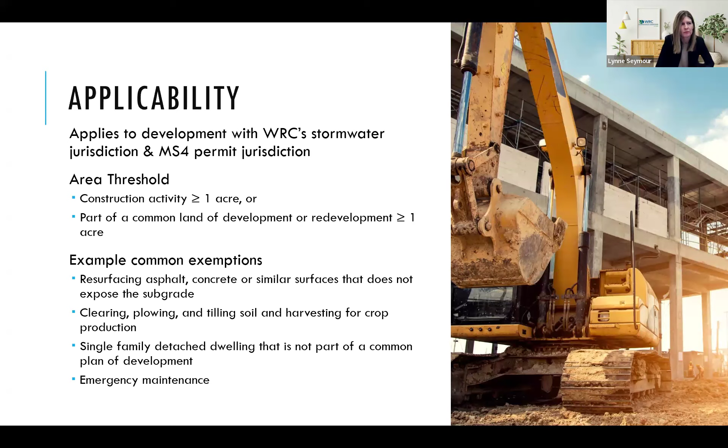Core design requirements. I'll try not to get too technical here, just give a quick overview of what the main factors are when we're going into our design requirements.

Channel protection and volume control. This requirement is necessary to help protect our natural water courses from increased erosion and sedimentation as a result of the increased imperviousness and runoff volumes that occurs with development. It helps promote groundwater recharge, and helps stabilize flow rates and base flow in our natural water courses.

It also helps address water quality control criteria for total suspended solids. This is the requirement that really the infiltration part falls into, so as we talk about MEP requirements, it's under this channel protection volume control.

And then quickly, channel protection rate control. You see there, 1.9 inches. That's based on the 2-year, 24-hour storm event.

Water quality control focuses on limiting the concentration of total suspended solids. A lot of times you hear the amounts or technical terms of 80 milligrams per liter, or 80% TSS reduction.

Examples that this can be achieved through are the infiltration BMPs, like I mentioned earlier, mechanical separators, or having a sediment forebay when you combine it with extended detention.

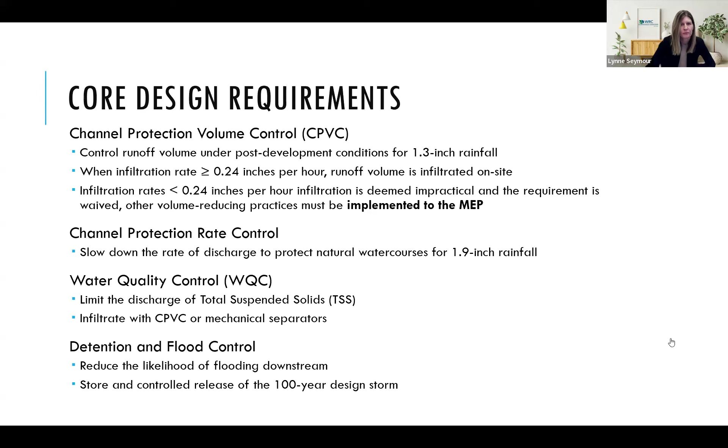Next slide. So O&M, operation and maintenance. When it's a county project or county-owned system, whether it's the Water Resources Commissioner, Oakland County Parks and Recreation, or the county as a whole, that's when the maintenance falls on us.

But for most other cases, non-county stormwater systems, the community is responsible for the enforcement of the O&M, as outlined in their stormwater management agreement, O&M agreement, and their MS4 permit.

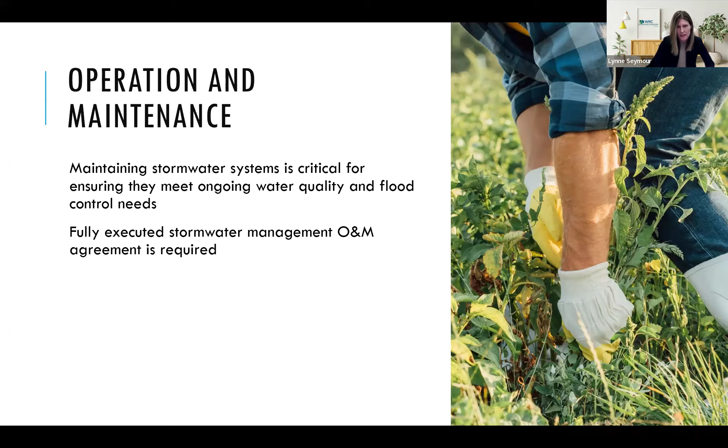So the SEMCOG tool, I just want to give a quick plug for this. This is something that we worked with SEMCOG to develop to help with reporting and tracking of your post-construction requirements to EGLE.

Many communities or MS4 permittees need to report annually on April 1st. So this is an easy way to input all the data, and SEMCOG will collate the data, summarize it, and send it back to you for uploading to EGLE.

There is a deadline of February 16th for SEMCOG to be able to put all the information together and send it back to you. But if you have any questions, Katie Grantham is a great resource, and she can answer any questions you may have.

Some of the information tracked, just for reference, would be a description of your stormwater system, drainage area, maybe what your short-term, long-term maintenance tasks are, the schedule associated with it, and then the frequencies, responsibilities.

Next slide. At this point, I'm going to turn it over to Dan to talk about MEP.

Thanks, Lynne. So just to start off, we recognize that the planners represent an important part of this process.

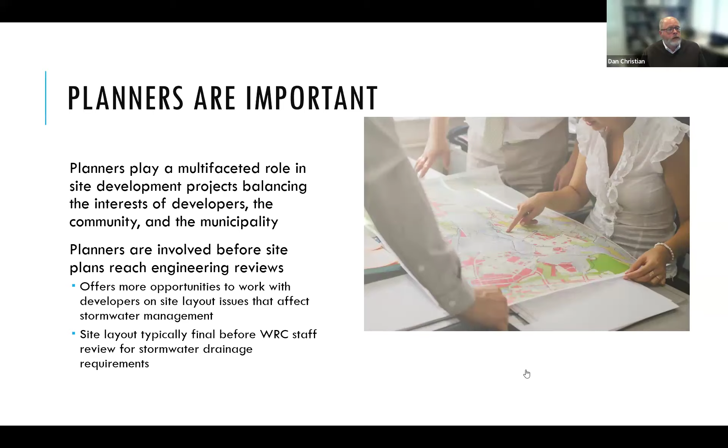As Lynne mentioned, what we're talking about here is when a site gets an infiltration waiver, and they get an infiltration waiver when the infiltration rates are so low that infiltration is deemed impracticable.

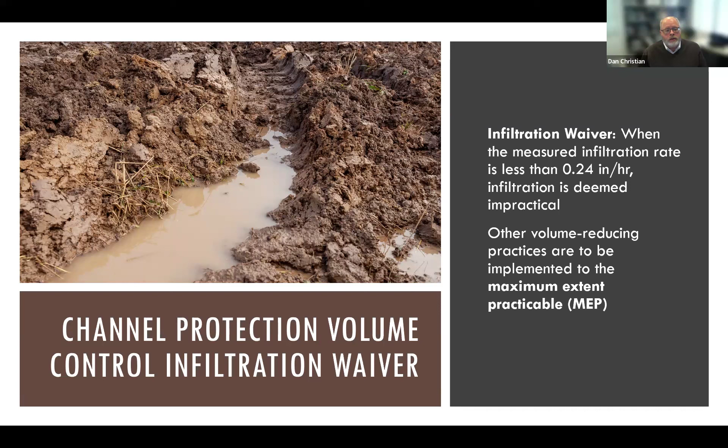And that is set at a threshold of 0.24 inches per hour. That's when we switch to this volume reducing practices implemented to the maximum extent practicable, or MEP.

We didn't make up this term. The state of Michigan didn't make up this term. It actually comes out of the Clean Water Act, so there's a long history about MEP.

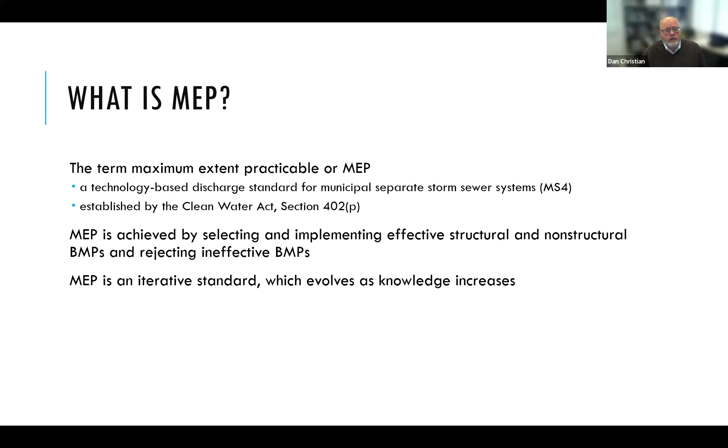And MEP practices can be both structural as well as non-structural in nature. It is an iterative standard, so it tends to change over time as our knowledge and awareness improves.

So here's the crux of what we're proposing as MEP requirements. And again, this only applies to those sites where infiltration is deemed impracticable.

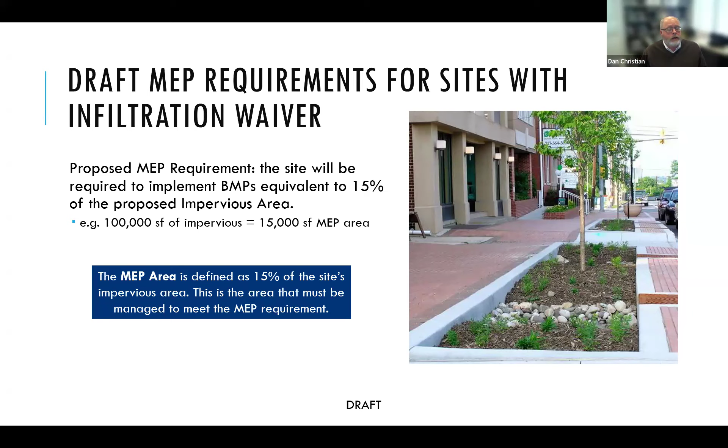What we're proposing is that a site will be required to implement BMPs equivalent to 15% of the proposed impervious area. So if you have a site with 100,000 square feet of impervious area, we're proposing that you would need 15,000 square feet of MEP area. And we've defined the term MEP area as that.

So to help with the process, we have identified a list of pre-approved BMPs that can be used to meet the MEP requirement. You still have the option of coming in with some other idea that will help reduce the volume in some fashion, but in an effort to try to make things simple, we wanted to have a list of pre-approved ideas.

What we did is you can plant, say, native plantings anywhere on the site. And if there's no runoff being directed to the native plantings or the MEP area, then the native plantings account for a 1-to-1 credit. So if you plant 1 square foot of native plantings, you get the equivalent of 1 square foot credit for the MEP area.

But if you design the site such that you're draining water to the native plantings, then you get a 50% bonus credit. So 1 square foot of native plantings is equivalent to 1.5 square feet of MEP credit area. We'll go over some details on each of these BMPs in just a second.

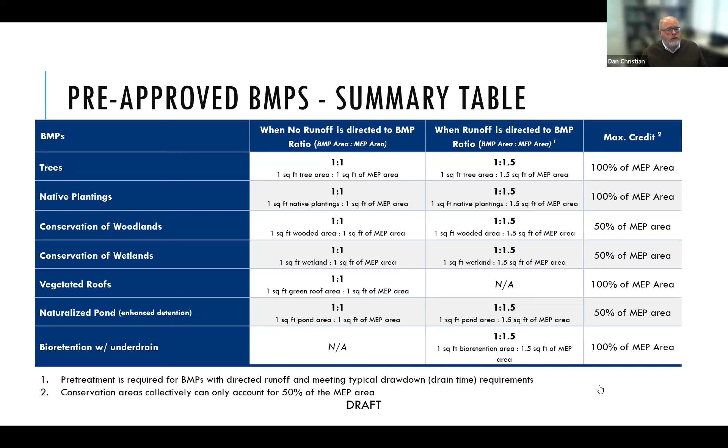Like I said, we're just going to walk through each one of these BMPs and provide a little bit more detail, starting with the trees. Trees provide a really wonderful benefit to the site amenities, but they also provide a lot of stormwater benefits, and so we really want to promote the use of trees.

In order to equate the trees to an MEP area, we look at the canopy area of the tree. To help out, we broke the trees into 3 categories: small, medium, and large. We defined the relative tree size based on the height the tree is expected to reach at maturity. Then we assigned an equivalent MEP area per tree, and that represents the canopy area of that tree after about 10 years of growth.

To further help, we took a commonly used tree list, I believe from the Parks Department, and went through that list. We identified the height of each species at maturity and assigned the relative tree size—small, medium, and large—and then the MEP area. So, for example, a balsam fir is a large tree, and you would get a credit of 500 square feet per tree for each and every tree that you plant on a site.

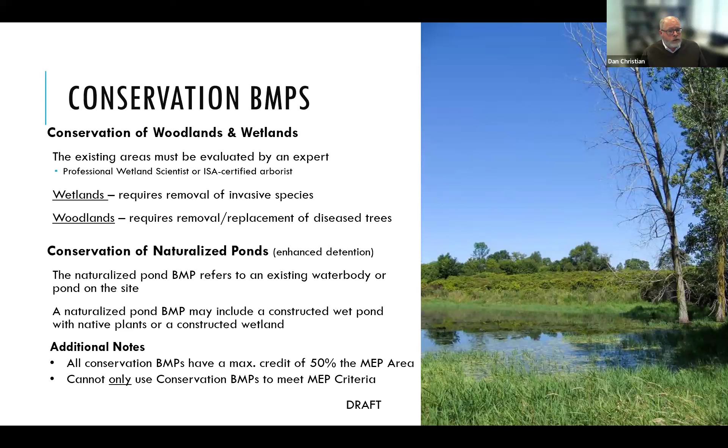A couple other practices: vegetated roofs. I know this isn't very commonly used, but maybe we can help promote additional use of them. A square foot of vegetated roof will count as a square foot of MEP area.

All vegetated roofs need to be evaluated for structural capacity. That's not unique to this MEP requirement—that's just good practice all around.

Bioretentions—you can also build a bioretention on clay soils. The challenge is, in any of these practices, you have to have a way to make sure that the water is drained away within a reasonable period of time. So typically with a bioretention, that means putting the underdrain at the bottom of the bioretention.

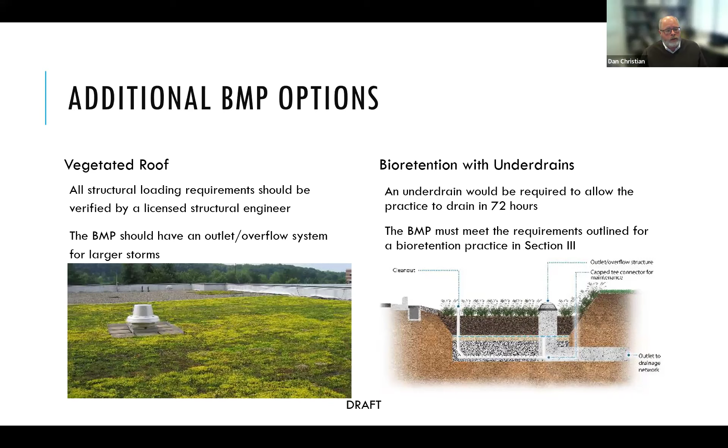And then, like I said, here we have a few examples just to kind of walk through this process. This first example focuses on a single-family residential type development along a street.

So in this case, we say the total development area is 286,000 square feet. We look at all of the different types of imperviouses—buildings, roadways, driveways, sidewalks—and add it all up. We have 177,000 square feet.

So if you take 15% of that 177,000 square feet, you get 26,550. That is the equivalent area of BMPs that we're looking to achieve on the site in order to meet the MEP requirement.

The maximum allowable conservation area is half of that, so we're allowing up to 13,000 square feet of conservation areas.

This particular site example conserved existing wetlands on a corner of the site, about 10,600 square feet.

We planted native plantings in this cul-de-sac in the middle, but we're not directing water to it, so this could be a raised cul-de-sac. And then we're proposing to plant 24 medium trees, getting a 300 square foot credit per medium tree, and 8 large trees.

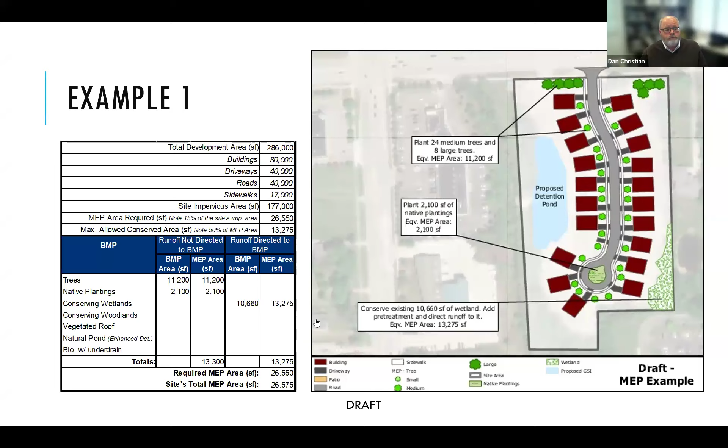Example 2 is similar to Example 1. This is more of a multifamily development. Again, we start with the total development site, add up our impervious area, and calculate our MEP area.

As 15% of the total impervious. And we can just write down what our 50% conservation area cap is—in this case, 8,625.

This particular site is only using, it looks like, the left-hand half of the site for the development. We have a lot of conservation areas going on in the back, in woodland areas.

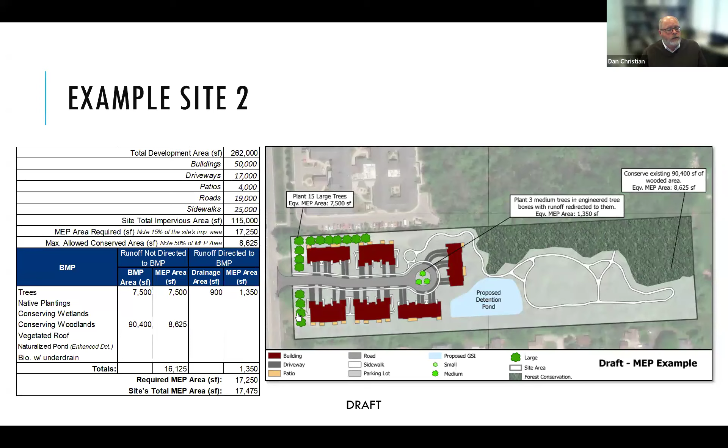We're planting some trees in a cul-de-sac, as well as around the perimeter of the site, which could also be used as a visual barrier.

Site 3 example: more of a dense commercial or perhaps light industrial site, mostly impervious. In this case, we've put the detention for flood control under the pavement, so that's not going to help us with our MEP.

Instead, we put a little bit of native plantings, maybe up in front of or next to one of the buildings.

And then we have a variety of tree plantings scattered around the site. Again, we can achieve our MEP area.

The 4th site would be an example of road construction—in this case, rebuilding the roadway with a boulevard section.

In this case, there are existing trees on the site that, after being reviewed by a certified arborist, were shown to be in good health.

Identified 14 trees that can be saved and counted towards the MEP. When you're saving and counting existing trees towards the MEP, we're looking at aerial imaging and estimating what the canopy area is of each of those existing trees.

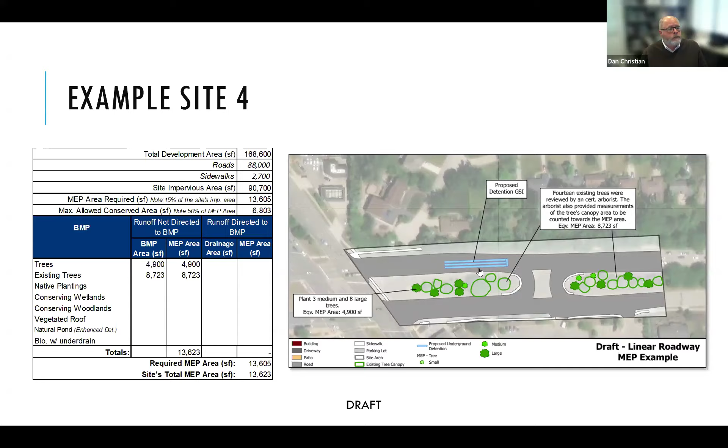We're supplementing those existing trees by adding additional trees, 3 mediums and 8 large in this example, and those are just scattered throughout the median area. So again, kind of a creative solution to achieving the MEP requirement.

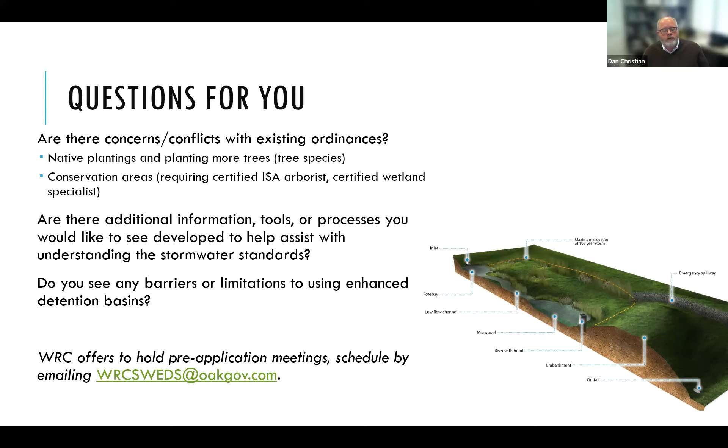Hello, this is Mark Steck with the Village of Beverly Hills. I had a question, if I'm heard. Yes, go ahead. Excellent, thank you. So could you just go back, not literally go back in the slides, but there were a couple of those examples where you showed like a mechanical underground stormwater detention system, but they were not included in this. Could you just explain a little bit why those would not be? So just so you know, I'm relatively new to this whole actual engineering stuff. So, but yeah, like, why are those not included?

So our focus today is really zeroing in on specifically the volume reduction target or requirement for the site development. Len went over early on that there's really 4 different requirements. The first one is kind of reducing the volume, and that's where we're trying to infiltrate the water. And then we also have a rate control for channel protection, a water quality control issue, and a flood control issue. So 4 requirements, we're focused on 1, and that's the volume reduction, reducing the amount of runoff from the impervious area. And in that case, because we can't count on infiltration, the detention sites don't really do anything for us. They don't reduce the amount of water. They just temporarily store it and release it at a slower rate.

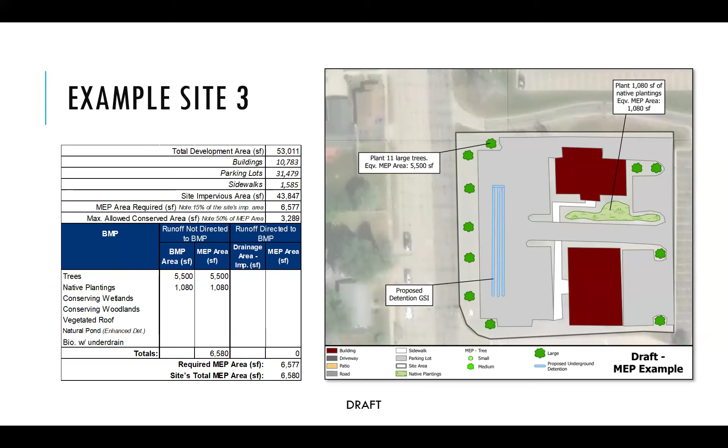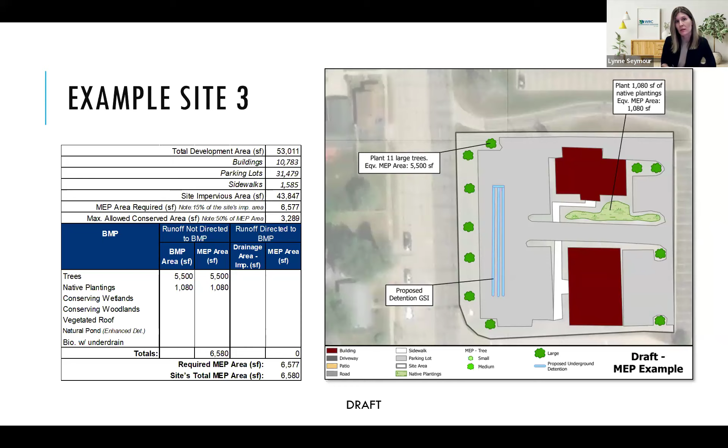Yeah, if you're unable to meet the infiltration requirement and you have a poor infiltration rate, this is what we're requiring to improve the site and achieve that volume reducing best management practice requirement. But you don't get the volume requirement outlined in the stormwater standards. Okay. No.

This is Kyle Wilson from SME. I just had a question about when it comes to the conservation areas, if you're going to use trees or a wetland, has there been consideration for other types of professionals, like a professional surveyor or landscape architect, to review those areas? I just see it as another type of professional that a lot of consulting firms aren't really staffed for. So it's more contracts and professionals that the owner would have to hire to evaluate those areas, versus professionals they're probably already working with, like landscape architects, engineers, and surveyors.

When it comes to surveyors, there's probably a big variance in knowledge on native versus invasive species, or the quality of the wetlands. So we can take your comment into consideration, but we felt most confident with the requirements we listed for the professionals reviewing the health and well-being of the conservation areas.

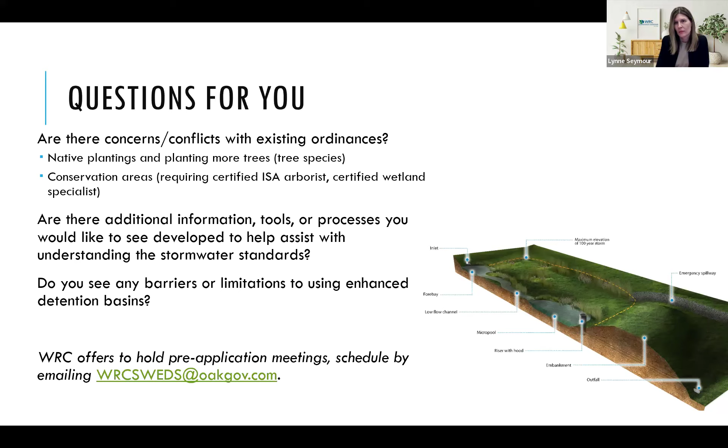About any other communities out there that feel there's potential conflicts or concerns, or would like to see other tools or information developed to assist in helping them implement these processes.

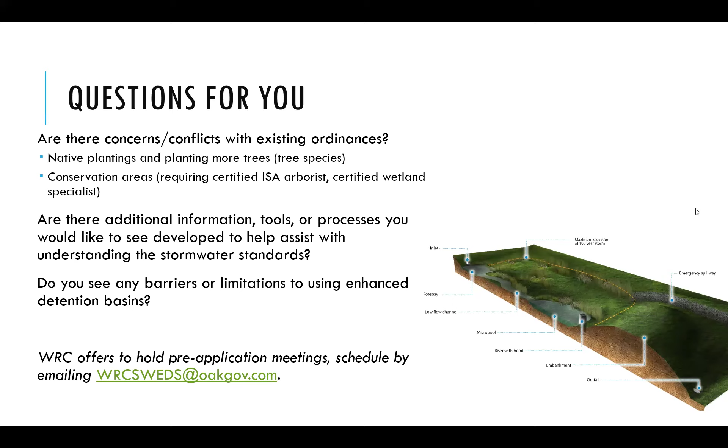Okay. And so at this point, I think we've gotten quite a few questions intermixed, so if folks have additional feedback, please get that to us. In the meantime, I do have some questions that were directed to me in the chat. As do I, Ryan. So yeah, why don't you go ahead with yours and then I'll go with mine.

Question: do you have a list or where can we find the 23 communities that have adopted into the drafts for the MEP standards? I don't have it readily available, so you can contact me or use the email on the screen and we can send it out. We obtained that information through a survey sent out to the municipalities, and that number is based on the responses we received through that survey.

Got it, thank you. Next question: how would you ensure that trees stay in place post-construction if they're used for MEP credit?

So the trees would be part of your stormwater post-construction maintenance, your O&M. So if, as you would put in a bioretention system, your trees should be listed as part of your best management practices for post-construction. Whoever is responsible for ensuring the maintenance and O&M of those would be the ones that would go through on either. I mean, trees are easy. I think you can use aerial desktop analysis to see if they're still in place, but it would be part of your post-construction requirements to verify whether these are still in place.

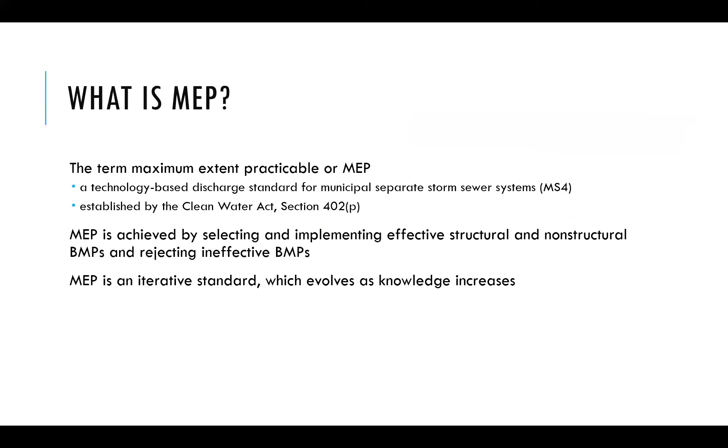I have another follow-up question if I could. Sure. Going back to the trees, if I remember correctly, wasn't a larger, more mature tree given more credit than like a new planting tree, a small 3-inch caliper or something like that? Is that accurate? Yeah, what we're proposing is existing trees within the public right of way that are being saved to meet the MEP. You're measuring the canopy based on either aerial imagery, or an arborist can go out and measure the canopy area. But if you're planting new, then the trees are categorized as either small, medium, or large, and we've assigned an area for each of the new tree sizes.

And existing trees, if they get cut down, maybe for utility repairs or something, you would take the MEP area canopy of that existing tree, and then you'd be required to plant the equivalent MEP area again. So if you have a fully mature tree that has a huge crown, you might need to plant several new trees, not just one. I could see that presenting spatial challenges, where you might have to open the whole project up to a new landscape plan to accommodate 3 replacement trees where one was, so they can grow healthily. Thank you.